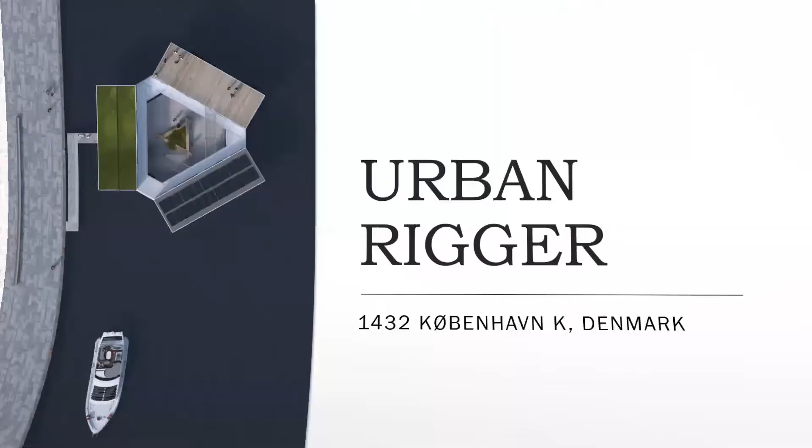Today we are going to do a case study on Urban Rigger, which is located in Denmark. The project is done by the architect Bjarke Ingels Group. The area of the project is 680 meters square, built in the year 2016.

Manufactured by Danfoss, recent years have demonstrated a substantial and sustained increase in the number of student applicants throughout Denmark. As the number of students continues to grow, additional student housing will be needed. There are few strategies that allow cities to expand, yet the harbour remains an underutilized and underdeveloped area at the heart of the city. By introducing a building typology optimized for the harbour city, we can introduce a housing solution that will keep students at the heart of the city.

This is Denmark, and this is the site where the project is located.

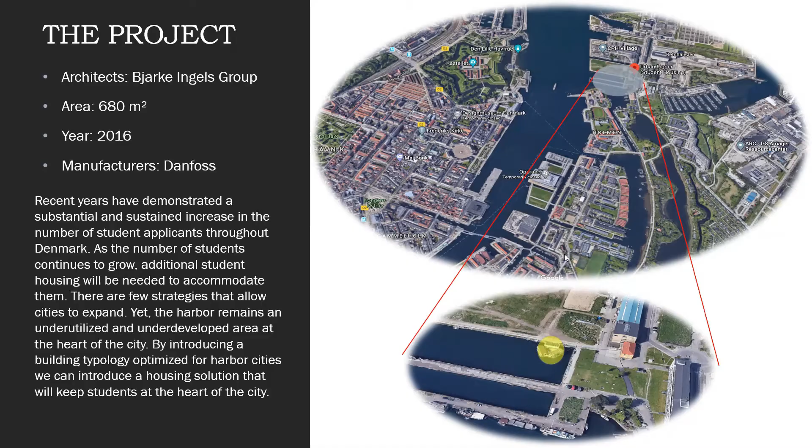Let's look at the user. Students are almost the first to experience the challenges of finding a place to live in an undersupplied market, often new in town and with a small disposable income. They frequently face difficulties finding affordable and permanent housing. In fact, rising urbanization in Europe means major cities will face a projected shortfall of more than 4 million beds by 2025.

Basic needs of the students: a shelter to stay, a comfortable space to sleep and study, a unique place which is different from society and which is under their budget. The students' budgets are very limited. Security is also important, along with a cultural space to interact with other students where different activities can take place.

Adding things as per their needs, where they can add things for their laptop, table, etc. A sense of personal space, where they feel personal when needed.

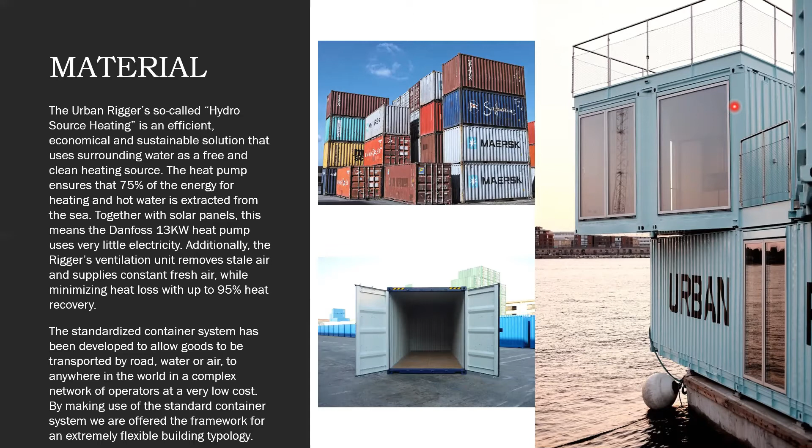Additionally, the Rigger ventilation unit removes stale air and supplies constant fresh air, while minimizing heat loss with up to 95% heat recovery. The standardized container system has been developed to allow goods to be transported by road, water or air to anywhere in the world in a complex network of operators at very low cost. By making use of the standard container system, we are offered the framework for an extremely flexible building typology.

Let's look at its plan. The Urban Rigger housing unit is a unique design: protected, floating, flexible, energy efficient and mobile. Totally 745 meters square spread over 300 meters square of housing. There are 9 plus 3 individual student residences of respectively 23 meters square and 30 meters square, a 160 meters square shared green courtyard, bathing platform and BBQ area, as well as a 65 meters square communal roof terrace.

Downstairs, below sea level, the 220 meters square basement comprises 12 storage rooms, a big lounge area plus kitchen, a technical room and a shared fully automated laundry, by stacking 9 container units in a circle. We can create 12 studio residences which frame a centralized winter garden. This is used as a common meeting place for students.

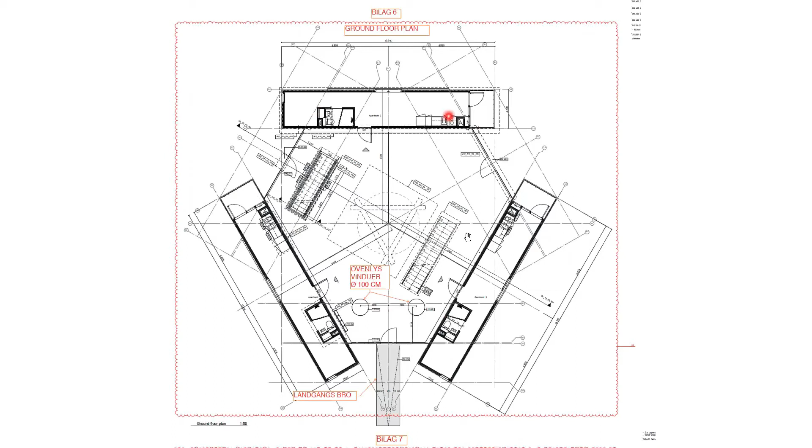Same way the other 2 are there. Let's look at the upper floor, which is made up of 2 containers joining and making 1 container to accommodate 3 rooms.

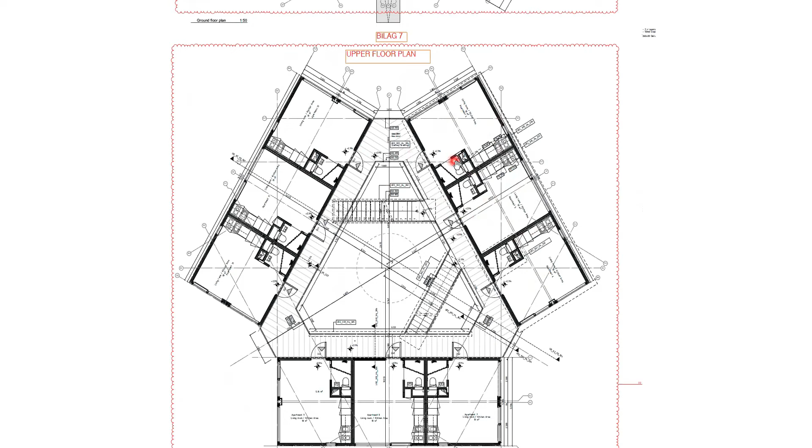Over here is their common toilet and pantry area. Same way, all the 3 container blocks are replicated.

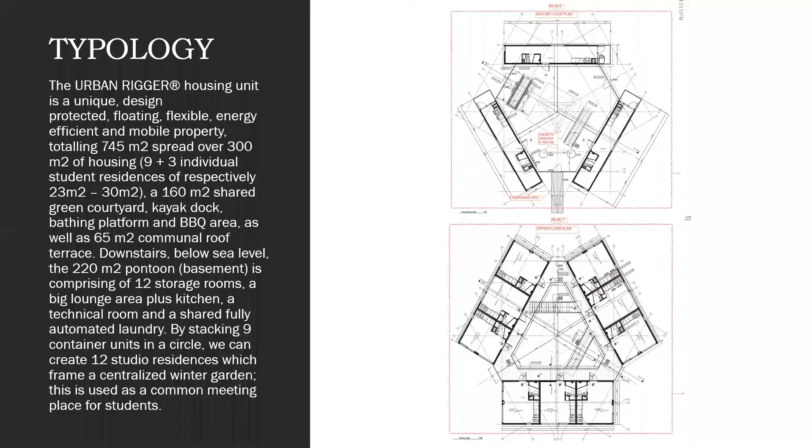Cities across the world are striving to achieve many of the same objectives for their waterfronts. They seek a waterfront that is a place of public enjoyment, and want a waterfront that serves more than one purpose. People want a place to work and to live, as well as a place to play. Accordingly, a place that contributes to the quality of life in all aspects: economic, social, and cultural.

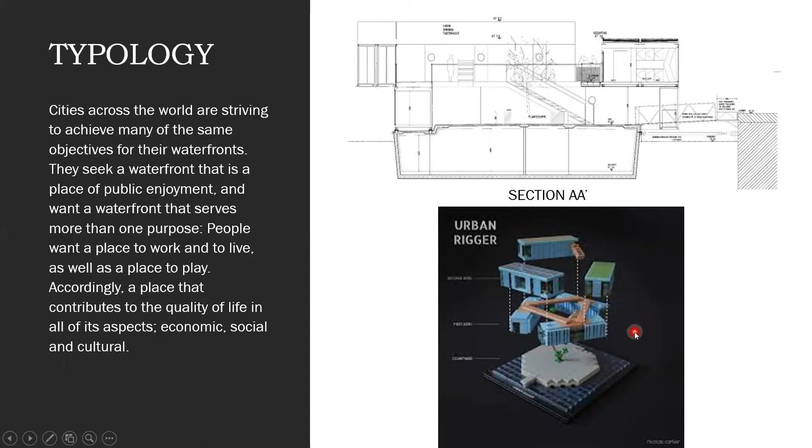Let's look at the evolution of the building. The Urban Rigger project shows how thinking smart can lead to creative ways of solving housing challenges, like placing buildings on water rather than land, developed by Kim Loudrup of Udvikling Denmark, in close collaboration with Bjarke Ingels and architects from BIG. These floating dorms are an ambitious attempt to meet the housing challenge.

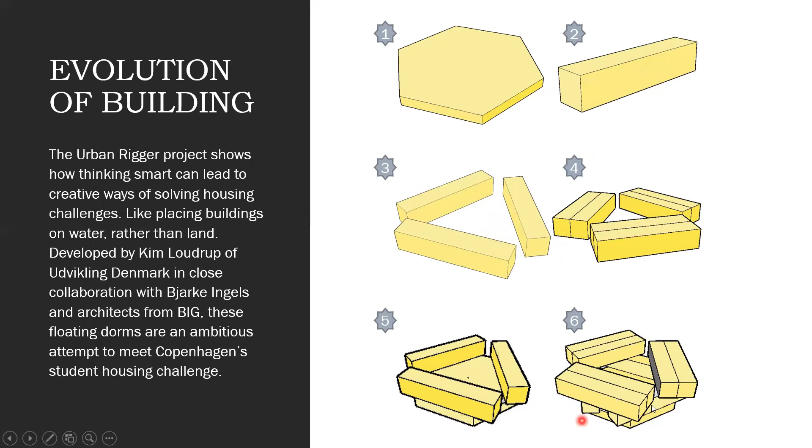This was the basement part for floating on the water. These are the containers which are stacked in the form of 3. On that, a combination of 2 containers is stacked upstairs, and this is the final form.

Let's look at what is the purpose of creating a courtyard like this. When they try to arrange the containers into a triangular composition to frame a central courtyard, this allowed them to minimize the footprint of the pontoon while opening views to the water, optimizing the housing unit.

Creating connections: by detaching the corners slightly, a hexagonal courtyard with open corners takes form, creating a connection between communities and allowing for further expansions.

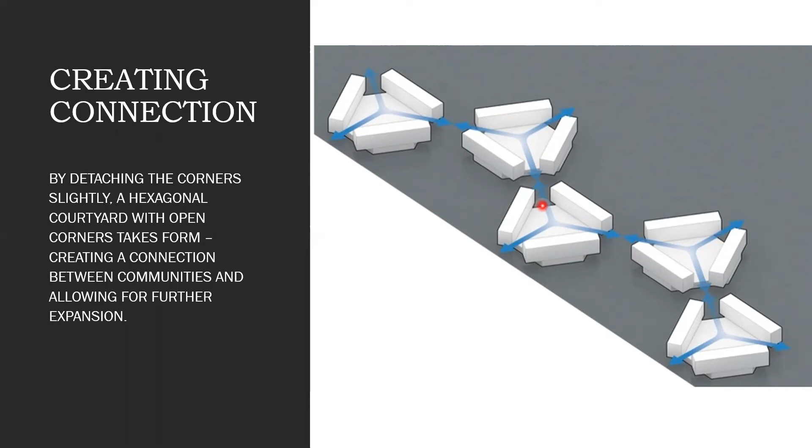Internal communication: courtyards at the heart of the Urban Rigger create opportunities for community activity within each unit, as weather in Denmark changes drastically from season to season. We enclose the gaps with greenhouse glass, minimizing thermal exposure during the winter months, to enclose the largest possible amount of space with the minimal amount of surface.

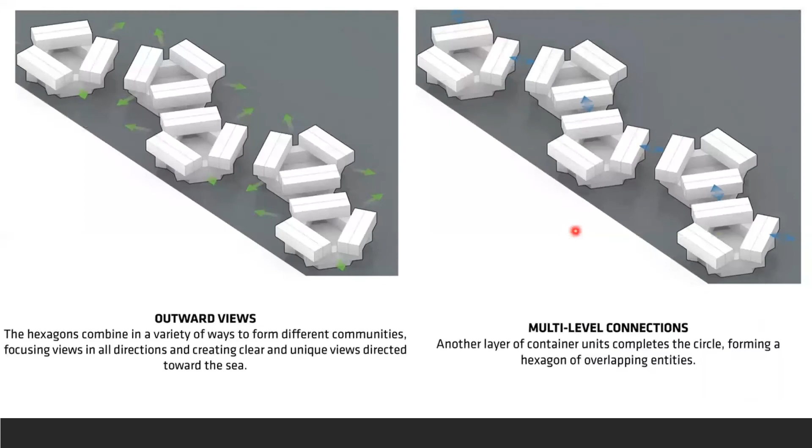Outward views: the hexagons combine in a variety of ways to form different communities, focusing views in all directions and creating clear, unique views directed towards the sea.

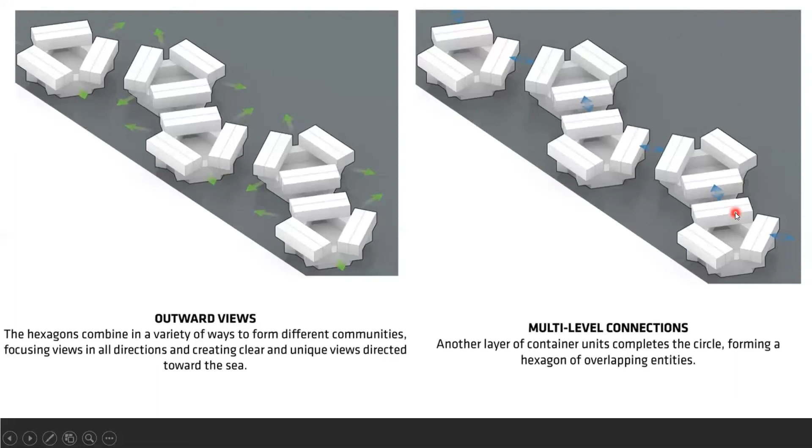Multi-level connections: another layer of container units completes the circle, forming a hexagon of overlapping entities. The Urban Rigger is also a powerful example of how innovative engineering solutions can help bring architectural vision to life and solve urban challenges.

I think the Urban Rigger has potential to play an important role in solving the challenges of urbanization. People moving to the cities is a problem, but it is also the solution. So how do we make the problem part of the solution? We think smart, and by thinking smart, I mean thinking sustainably. Sustainable solutions mean that they both look good and are nice to live in, but also that they perform.

Thinking smart depends on cultivating a deeper cooperation across stakeholders and building strong relationships between engineers, architects, and contractors in particular. The Urban Rigger Student Housing Project is one example of how working together can make a real difference to life in a growing city, by using additional building principles for connecting and floating elements so that the concept can easily be assembled.

Floating apartment blocks of varying size can be assembled as needed and desired. Urban Rigger can be located anywhere with water access and can easily be moved to wherever housing is needed but space is limited.

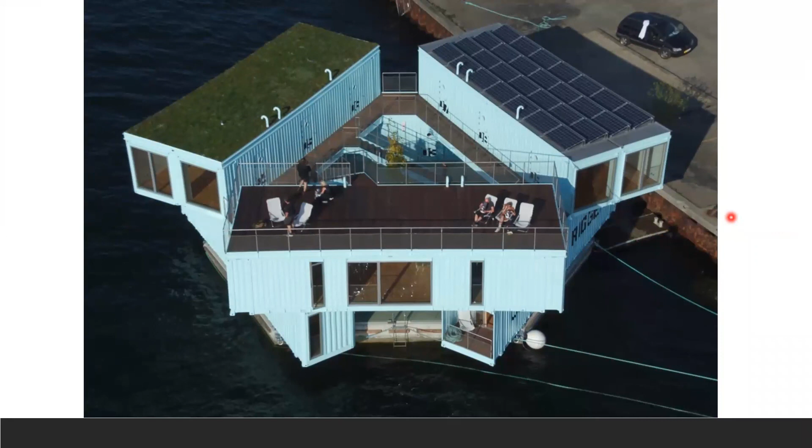This is the ISO view of the Urban Rigger. These are some views of the Urban Rigger.